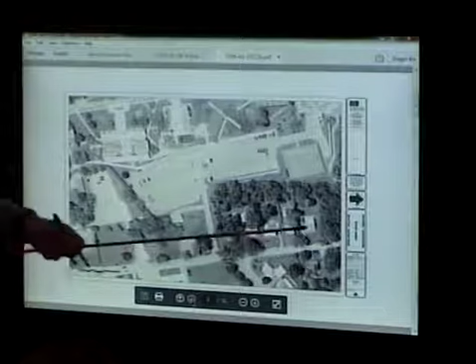Here is E-Lot, which is a student, faculty, staff parking lot. Atwater Dining Hall is up here. The Wright Theater is here. The Johnson Arts Building is here. St. Mary's Church is here. Shannon Street here, Short Shannon Street here. Okay, that's how it exists today, pretty much.

There's a house that isn't pictured here - this is college student housing, 7 Shannon Street, I think it is. And then there's the Insight House, which is one of the solar decathlon houses, which is here. There's a white barn here, which the college uses for cold storage for the theater department.

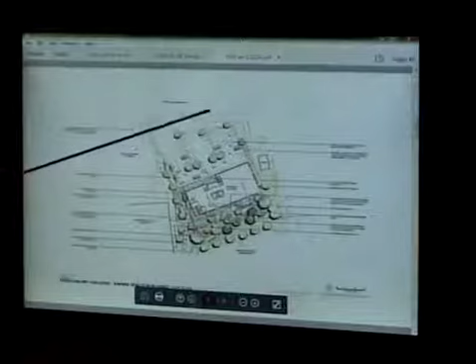So this is the south end of the parking lot where we propose to put the building. Here's the access road that comes up from Shannon Street into the Johnson parking lot. You enter the building from the north side at grade, or you enter and exit the building from this sidewalk, which comes from College Street, down behind Sunderland and Johnson into an entry plaza, entering the building here, or here, both at grade.

This is Keith Wagner Associates, our landscape architect, and this is one of their drawings. You can see we've done quite a bit of landscaping here.

We've been speaking with the church, St. Mary's Church, Father Luke. We do a little regrading along this area to capture stormwater runoff, bring it down into a series of rain gardens here. And I'll let Brent talk to the stormwater management plan and the rest of the public utilities.

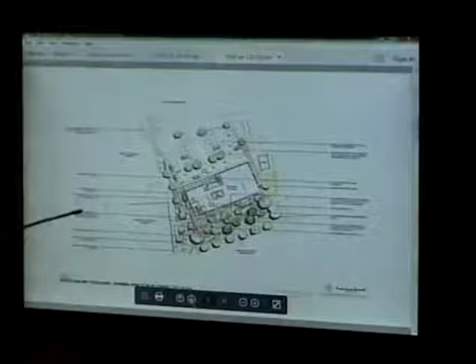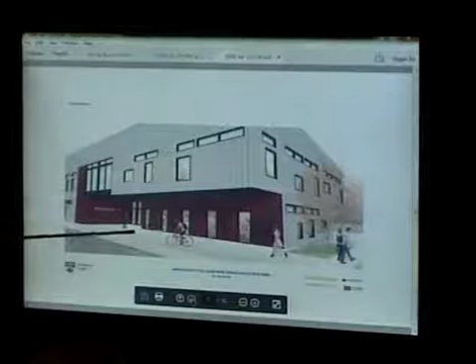Here's the main entrance, we'll call it. Again, you come in at grade, some bike racks and the like.

This is a view as you come down the path from College Street behind Johnson and Wright. So this is, I wouldn't call it a secondary entrance, but another entrance to the building.

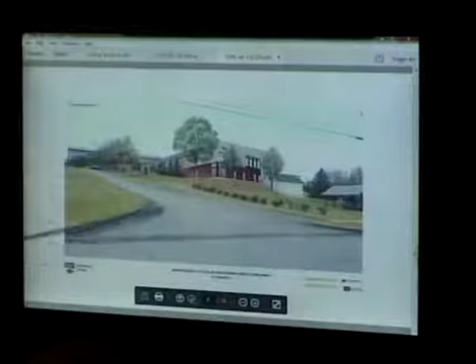Here we're looking - here's St. Mary's Church on this side, the parking lot right here. This is the entry road to the church parking lot. And you're on Shannon Street at the base of that church drive, looking up at the building.

Okay. All of them? Yeah, next one. No, I think that was the last one. Was that the last one? Mm-hmm. Okay, so could you go to the renderings, the last package we sent? Yep.

John is our architect for the project. Ask John to talk about the architecture a little bit. Okay, and then we'll do the site and do stormwater, the civil design.

So this is the best spot to stand over here. I think so. Okay, well, I don't know, if you stood on the other side, I wonder if we would hear you better. We could just try it. You guys hear me now? See? Yeah, okay, so we just need the signal back.

There we go. Okay, so as Tom said, we've made a few adjustments and developed some more renderings. And what I'd like to describe is the major components of the architectural design.

So to begin with, we are working with what's called a pre-engineered metal building system, which means this building's steel structure components are going to arrive as a package to the site and get assembled onto an existing site-cast foundation that will be put in place. Oftentimes these pre-engineered metal buildings are what you see out in industrial parks and in the sprawling edges of towns - not always the most attractive buildings to look at, but they're economical, they go up quickly.

Our challenge here, what we're trying to do architecturally, is to fully understand the pre-engineered metal building system and its components, and get as much as we can out of that system to make something that will look attractive on the Middlebury College campus and to the surrounding community.

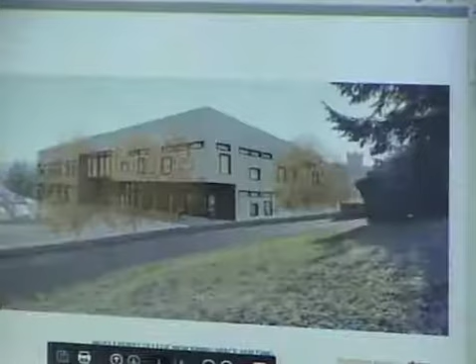The first major strategy is to use the steel structure. We start with what is essentially a big box, but then carve into it in certain places and remove portions, like the whole front entrance here. You can see how it's recessed, creating a long covered entry, not unlike the field house built on campus. I like to think of it as just a front porch in a sense.

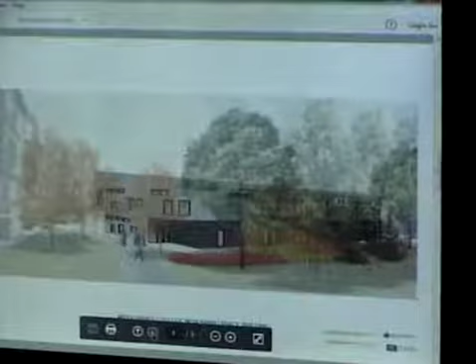Moving around to the secondary entrance, you can see this is all a dark bronze color instead of the red—this is the southwest entrance. Here too, this shell of a building has been carved into and parts have been removed. So that's a strategy to try to break down the mass.

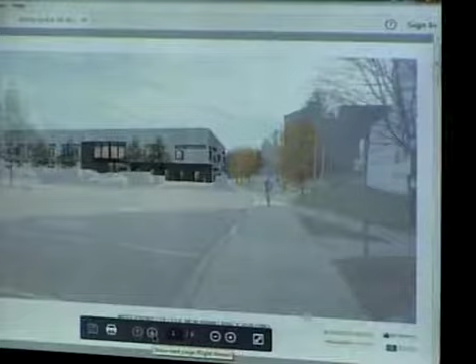The second strategy is to think about the skin that's available to us, the metal panels that come with these kits, and how we might use those off-the-shelf parts to create a sense of hierarchy and scale and break down the building.

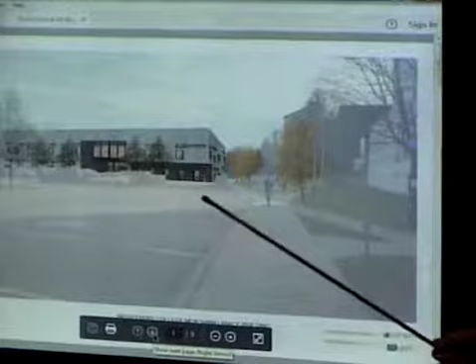We're working with two different siding systems or panels, and I've got samples of the real thing. This is what we're calling the secondary or minor field of the envelope, which is this dark bronze ribbed panel. And this silvery gray panel is called a batten panel system.

The idea is that the primary field, which you see here in silver gray, is predominant, and it picks up on the color scheme of the stone buildings on campus and of St. Mary's Church nearby. It also has a batten profile that relates to the copper-clad volumes on the Johnson Building adjacent to it. So we're trying to pick up on the shadow lines, the profile, texture, pattern, and rhythm and spacing to tie it into its neighbors and the general campus language.

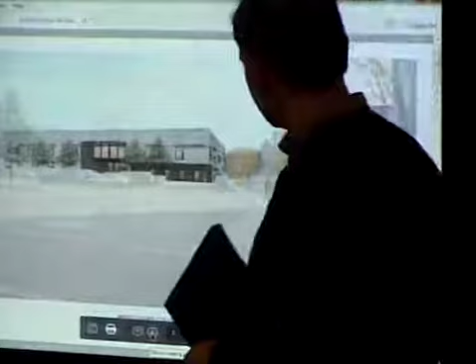This secondary system, the dark bronze ribbed panel, will have ribs running horizontally, whereas the battens run vertically. This is not unlike the courses of shingles and clapboards you see on some of the houses in the surrounding area. It's similar to the gable end of the field house at the college, where there's parking adjacent to it—similar to that panel as well.

This darker skin relates to the primary entrances of the building, to the approaches and where you come in and actually enter the building. So it reinforces this idea of these transition spaces, or these porches, as I think of them.

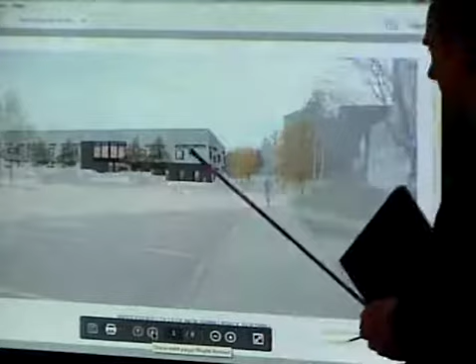One more strategy with the overall massing to keep the scale of the building down is the roof slope, which is real shallow—only a 1 in 12 roof pitch. We're doing that to keep the overall height of the building down. We're at 34.4 feet at the high end, sloping down to about 28 feet at the low end.

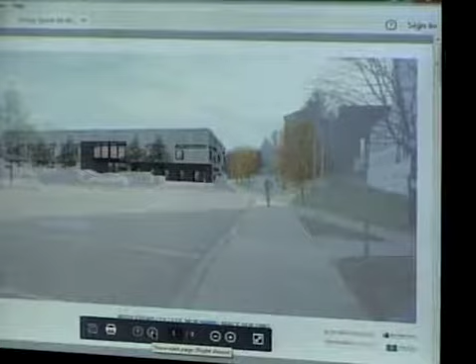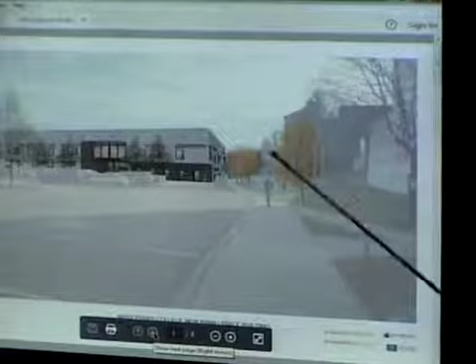The third and final obvious architectural element of a building is the windows and doors. We have three different kinds of windows and doors we're using in this building, and we're trying again to create a hierarchy and some visual interest. At the ground level, in that dark bronze zone, you can see these big 4-foot by 8-foot windows that come down to the ground.

And so that's really where pedestrians are, where people engage the building, where when you're inside the building you're looking back out to the exterior. So that happens all around the building in the dark bronze zone.

The second system is these higher clerestory windows, if you're familiar with that term. These happen up in the silver gray zone, above typical ceiling level, about 10 to 12 feet up, and they let in daylight up high. You can't really see out of them other than to see the sky, but they let daylight into the interior spaces.

And then there are also these windows that you see here, which we call vision windows, more at the height of a human being. So when you're in your office or your classroom, you can look out and see the surroundings.

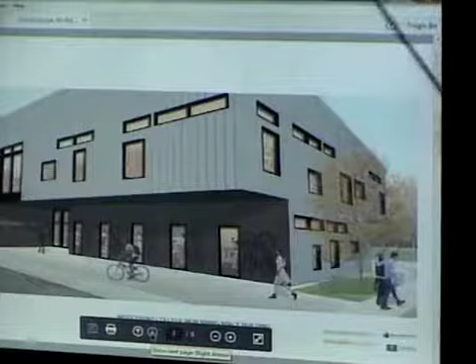And then the third and final piece of the scale of the window and door system is these major areas of glass. Jen, maybe let's do a quick spin around the building.

So there's one back here at this entrance. If we keep going, you can see it there on the corner. These are located in places where there are main entries, where there are particularly nice views, like here out to the east, to the mountains, and in places where there's an obvious relationship to the site. So, main approaches to the entry, views to the exterior, and they correspond to public spaces in the building, like the lobby and the student gathering and meeting spaces.

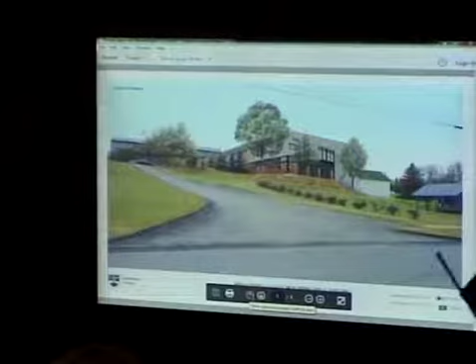So that's a quick overview. Let's look at the rest of the renderings.

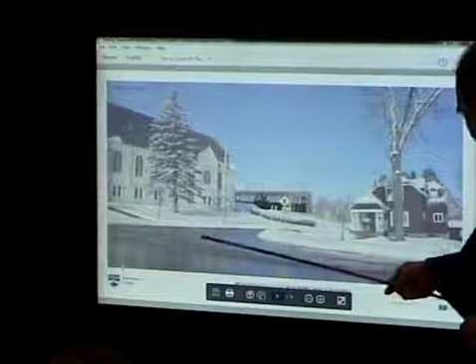This is from Short, Shannon and Shannon. I'm sorry, this is College Street, and this is Shannon. There's St. Mary's, 248 College.

So you can see we've rendered the building as it would sit in this view. This is Short, Shannon and Shannon. There's the drive up into the existing E-lot.

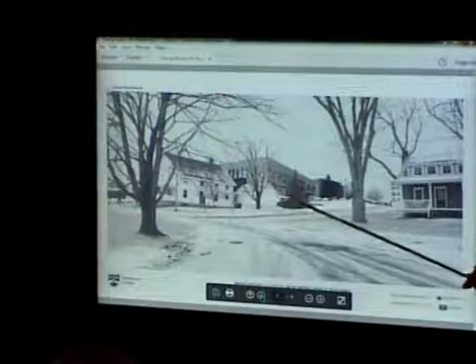So the building really, because the land terraces down from the high ridge on the campus all the way down into town, we've tried to place it into that overall topography so that it's stepping with the massing of the campus and the town.

This is coming up the drive, not quite to the parking lot. That's the barn that Tom described. There's Johnson Building. I think, is there one more? No, okay, that's it.

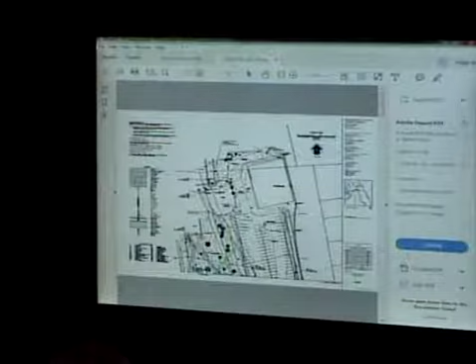Good evening. My name is Brent Rakowski. I'm with Otter Creek Engineering, the civil engineer for the project, working with the college in developing this property or this site.

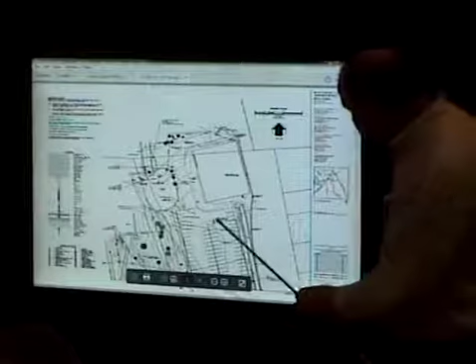I think the first area, just in terms of orientation, as Tom mentioned, this is the northern part of the Johnson lot and the existing footprint where the tennis courts currently are. Here's the southerly extent of the property adjacent to the church, and here's the actual line of the parking lot that's there, and access up off of Shannon Street.

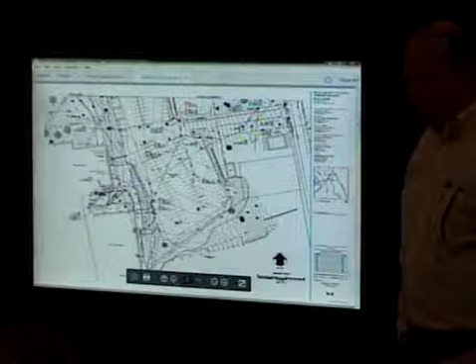For this project, Otter Creek has developed a plan for water and sewer service, so they will both be municipal connections to the town system. The water will be connected to an existing water line that runs along Shannon Street.

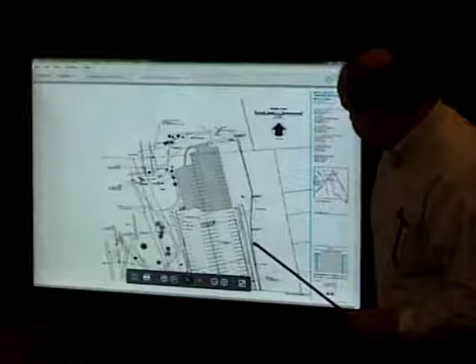A new 8-inch water service will be run up the service drive and then turn. Jen, if you could move to the next, keep going. No, I don't know if you have a proposed plan. Oh, there you go. So this is a proposed utility plan.

As I mentioned, we will be tying onto the town's municipal water system right along Shannon Street and running a new service line up to feed the building. This will come into the new building here at the northern end.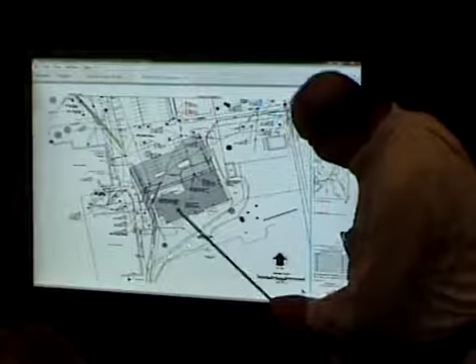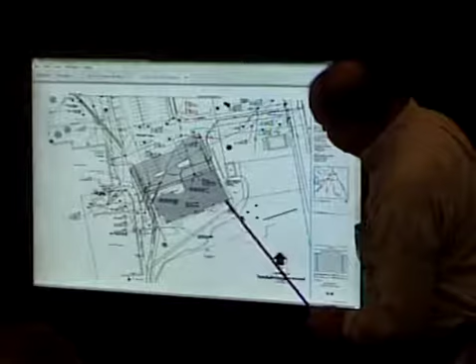In terms of a reference, it'd be good to keep in mind that here's a loading dock area that goes to the Johnson building, and an existing tree here, an existing tree there, just in terms of scale and where that new building sits in relation to the existing parking lot.

Part of what we are doing from the stormwater side of things is there will be some rerouting of existing drainage coming down from the uphill portion of the site, which will be picked up and collected in the existing system, but rerouted and then tied in to the town's collection system.

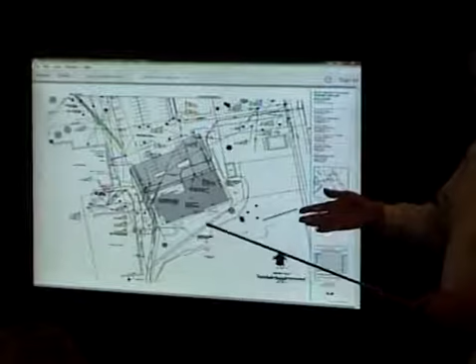From the building, the rooftop has a uniform slope, with everything draining to the south. Falling off that rooftop, it'll land onto a stone drip edge, and within that stone drip edge there will be an under drain pipe to collect the drainage. Once water falls onto the stone, it gets into this under drain piping, which will route it to a stormwater treatment area.

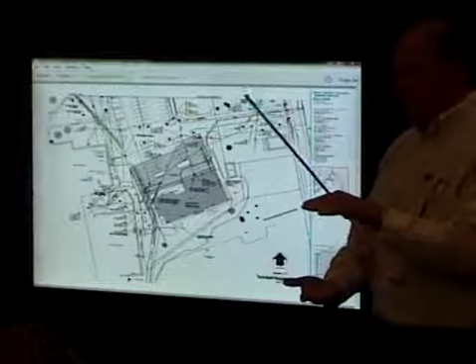The intent of that stormwater treatment area is to filter the runoff. Any pollutants in the runoff will filter through a planting bed section—a mixture of compost, soil, and sand—and below that will be another under drain, which will pick up that filtered runoff and route it around the building, tying back into the town's collection system. Larger events will be...

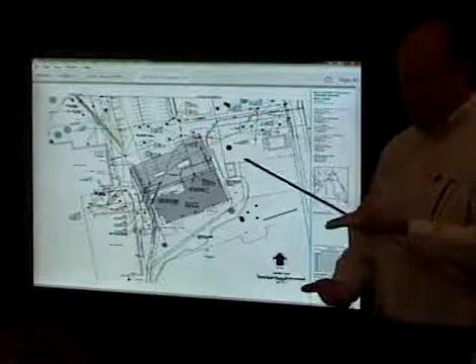temporarily detained within this pond—I don't want to say pond, that's the wrong idea. It will allow for some storage capacity. So larger storm events will be captured and detained for a little bit, then released into the town system.

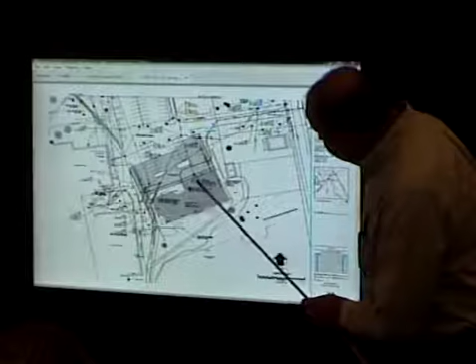So that's what's happening for stormwater and water to serve the building. Sewer will come out of the mechanical room and tie into an existing sewer line that runs down the hill back to the town system.

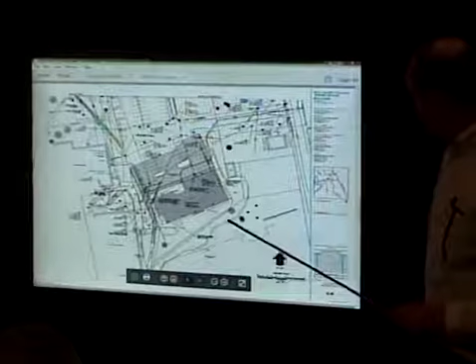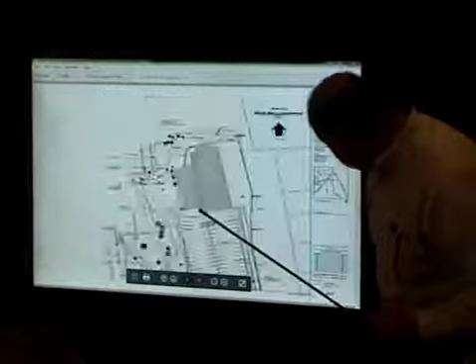Jen, if you can go to the north side of the lot, or maybe the back a little bit. The C4, I think it is. One back, one more. Three, yeah.

As I mentioned, the existing tennis courts on the north side of the Johnson lot extend roughly to this location here. They will be removed, and that area will actually be converted back into grass.

The existing parking lot that ends here will be extended to the north. This area will be regraded slightly to provide a uniform slope, so that runoff landing here will travel across the parking lot. What we will be doing is installing a stone diaphragm along the edge of this parking lot to pick up runoff coming off the parking lot.

Within that stone diaphragm is similarly an under drain, which will pick up water that filters down through the stone. That under drain will daylight to an existing culvert just to the north of the site, into a natural drainage way that runs down towards Weybridge Street.

As part of our work for the project, we are required to obtain a stormwater discharge permit from the state, similar to what some people refer to as an operational permit. There will also be a construction general permit, required for disturbance during construction—anytime you're ripping up and exposing earth with more than an acre of disturbance, you're required to obtain one. So we will be doing that.

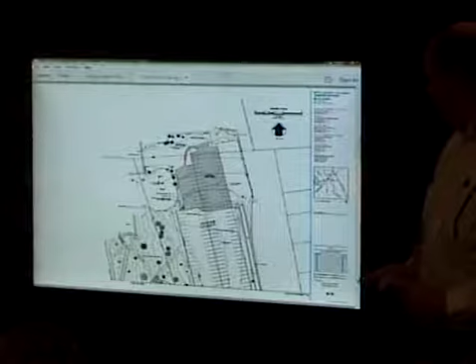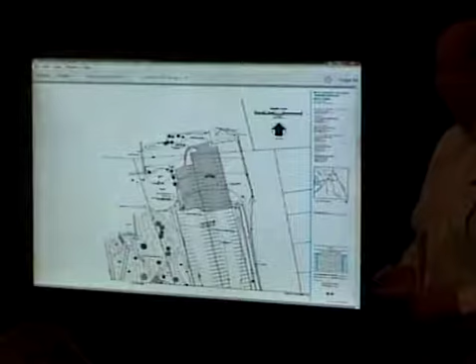We're slightly above that level, but we will be getting one of those along with the operational permit. And with our water and sewer improvements, we will be doing a water/wastewater permit through the state. Those are both municipal connections, as I mentioned. And I think that's all I had.

Brett, while you're there—could you show us what amount of parking will continue to be used for the college during construction?

Our logistics plan for construction would be to take the entire south end, which is what you see here. This part of the lot will be closed during the construction period.

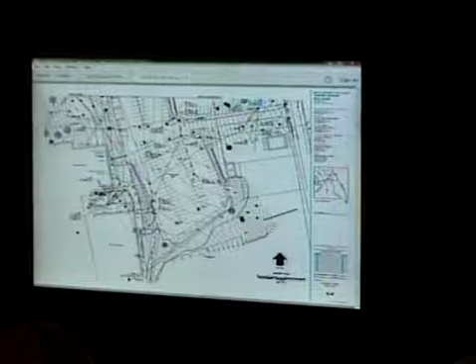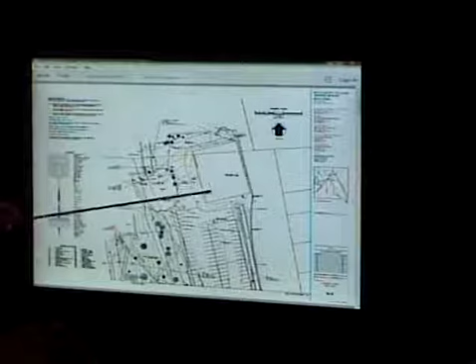The conversion to parking would be the first thing we would do. So we would like to, if we get all of our permits in hand, start construction following commencement, right around June 2018—doing this work first while the language schools are in session. When we start for the fall term in '18, this parking lot conversion work will be done.

Other questions from the board at this time? I was just—you started talking about collection, the difference between stormwater collection and sewer collection. You kept referring to the town's collection system. Stormwater is not going into our sewer system, correct? It is not going into the sewer—you referred to the town's collection system. Oftentimes, engineering speak, they're both referred to as sewer.

You're referring to a town stormwater system that collects the stormwater and takes it to a separate outfall, right? Yes, correct. The town actually has existing drainage, a stormwater collection system along Short Shannon Street that runs down towards Weybridge Street and then discharges into the natural ravine along Weybridge Street and then gets to Otter Creek.

Is there fire protection hydrant back there? There is actually an existing hydrant down on Shannon Street. Short Shannon, yeah? I'm trying to find something that works here, sorry. On Shannon. What about the aerial photo?

But won't the building have pumper connections? Yes, the building will have a fire department connection on the building. And I know Chief Shaw has looked at the plan, and I can't recall what he said about a hydrant connection, Brent. I believe the existing hydrants, I believe that's it right there in the picture. Yes, that's it. That's where it's located.

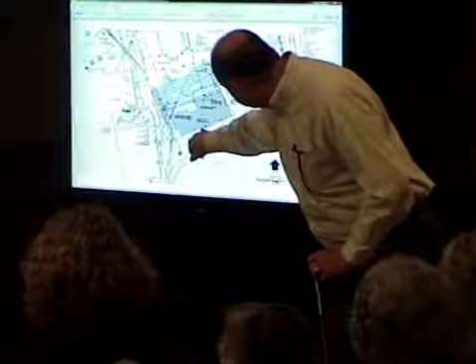One other point I would like to make that you just brought up that I hadn't mentioned is that just this past week, we had done some soil testing up on the site. So this is a progression of the design as we work through these design phases. And we did some testing along the proposed route of the water line, also in the footprint of the building. You can see in some of these locations, there's obviously you can't read it, but there's a little circle, darkened circle with a number designation next to it.

Those indicate locations where we did soil probes and soil borings. What we found was that there was a presence of ledge in the area. It's inconsistent, very similar to what we find in Middlebury. You'll have ledge that's 2 to 3 feet deep in locations, and then 20 feet off to the side, you won't find any ledge.

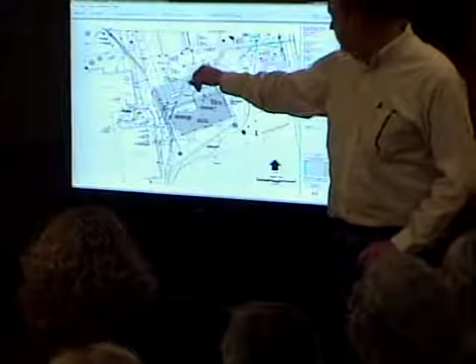So we are anticipating that we will likely have to blast to put that water line into depth. Regarding that, is it still a practice to do pre-blast surveys? Oh, yes, adjacent houses. Yes, so as part of that, part of the state permitting, we will be going through Act 250 as well.

Act 250, or I should say the Agency of Natural Resources, has recommendations for blasting that include pre and post blast surveys. They will do an assessment before any of the work is done, come back afterwards, do that same assessment. That is incorporated into the documents that the contractors will be using.

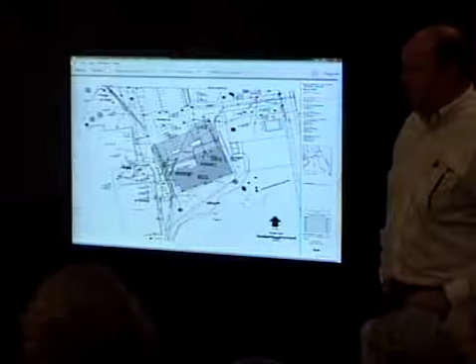Ann, you had the floor? I have a couple of questions, probably for Mr. McGann.

Does the college anticipate replacing those tennis courts elsewhere during this period? No, we don't. Those are purely recreational tennis courts.

Okay. And what about the computer science department when the new academic building, which isn't before us obviously, is completed? Will the computer science department be relocating elsewhere on campus from this temporary building? We're working through that scenario. So the purpose of the building is to relocate the Department of Computer Science from Bicentennial Hall to allow us to expand the remaining programs that are in Bi Hall.

And at the same time, they'll be on the second floor of the building. At the same time, the first floor of the building will—we haven't determined the final sequence yet—house the occupants of Monroe, an academic building on campus, the occupants of Warner, another academic building, and the residents of Adirondack House, which is up by Adirondack Circle on College Street. It's the career services building.

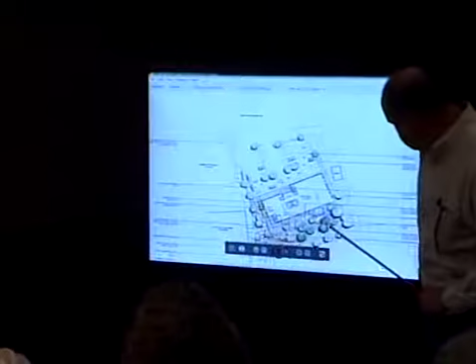I don't think we have that. I didn't see it when I went by it. I don't think so—there are some existing trees in that area, roughly that height, but I believe... Well, I'm wondering whether there's any possibility—maybe there isn't room for it, and maybe the soil's the wrong stuff, I don't know—but incorporating some larger evergreens, say, to break up that corner a little more.

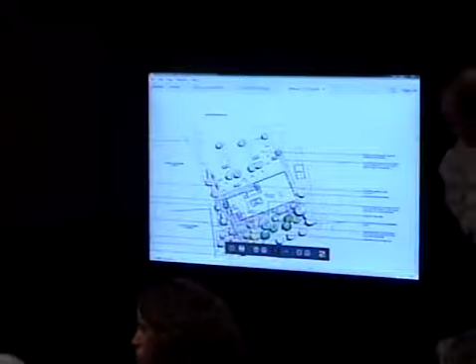That might be a question for the landscape architect, but we can certainly answer it. I can tell you that the renderings show the actual species, and they're all at the appropriate deciduous heights, and that was reviewed by the landscape architect. And some of those in that hedge may grow taller over time, but I'm more interested in a more immediate screening. Okay.

Other questions from the board at this time? Yeah, I have a question. John or Tom, what's programmatically happening on that corner of the building we were just looking at with the tree? Is there a trash area or service dock for the building? There isn't a loading dock.

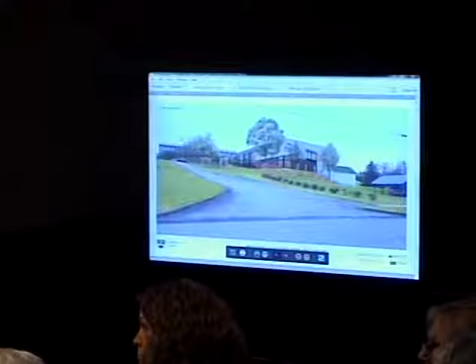Typically, how we handle the trash for an academic building like this is custodial services collects the trash and puts it out in front of the building. Our custodial services recycling truck comes by and picks it up off the curb.

Is it a big classroom? I see a big volume on that corner, on the ground floor. That ground floor is actually more of an open office and meeting space plan currently. It's flexible and will change over time. The idea is that corner can look out into this rain garden area and landscaping. Right now it's designated as a group meeting space for the offices on that floor.

Are you anticipating any volume of foot traffic, say, coming from College Street, walking down Shannon Street and then maybe up your access road? Not cutting across and coming down Shannon Street any more than the students do right now.

There is a footpath if you come down behind—let me point. College Street is out here, and the students tend to come down this way and then cut through a gap in the trees at the top of the St. Mary's parking lot, down St. Mary's Drive, across Shannon Street, through the elementary school parking lot, and there's a cow path, for lack of a better term, behind the elementary school leading down to town.

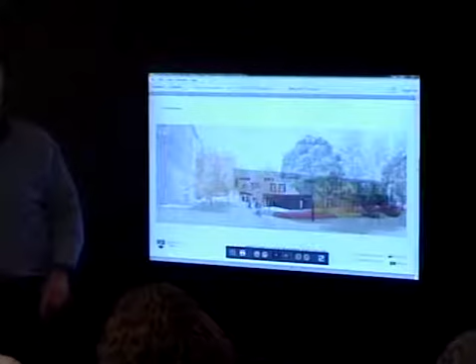But this will be a destination for students. So yes, we will have students coming to this building from College Street, and we'll have students coming down the other way, from Chateau and Bicentennial Hall. We don't see, if I got your question, increased pedestrian traffic going beyond the building.

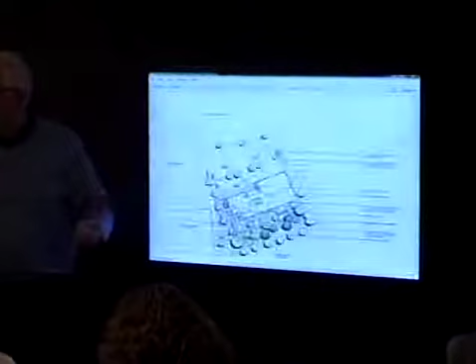Well, I was by there today, and there were a couple of students walking alongside the road. I believe they had come down your access road onto Shannon Street and were walking south towards town. I don't know if they went behind St. Mary's School, the old St. Mary's School, or if they went out that street. There's a number of times I've been through there when students were trying to cross where there is no sidewalk on the north end of the school into the student residence there.

My thought was, would it be possible to extend the sidewalk on the northern side of the driveway of St. Mary's, more to the north, so if students were going up that access road or to the two buildings there, they would use the sidewalk rather than walk in the road. Just a point of observation. We can look at it.

So the north side of the access drive—I see the students on the east side of Shannon, north of St. Mary's. The St. Mary's sidewalk ends at the northern egress, wherever paved, and it stops there. If a sidewalk were to begin at that northernmost point and go north, maybe to the point where Shannon and Short Shannon intersect, that might help out pedestrian traffic.

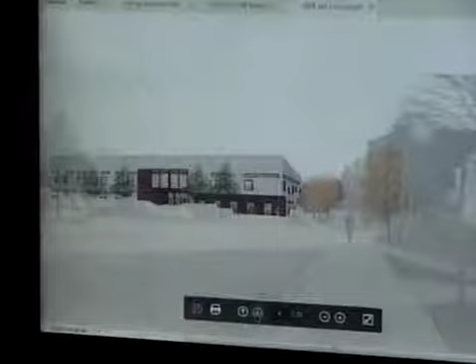What is that? I'm on C4. C4 is the one with the new proposed building, that one. What?

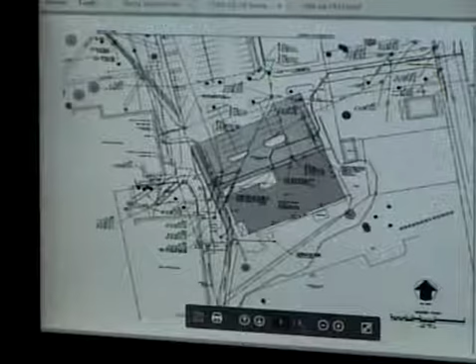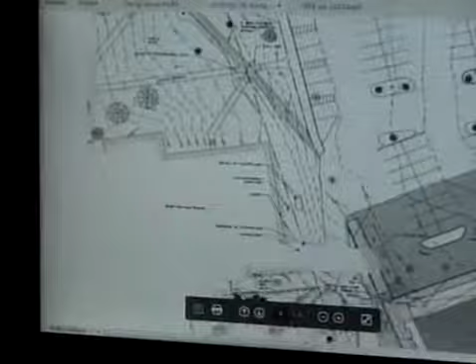What is this space here? That's the treatment, the filtration. Well, there's actually an outdoor patio area, a seating area. That's a component of that, and then just to the east there you're seeing some, almost looks like eyes, I guess—those are the treatment.

That is a portion of the patio. So this is actually an outdoor seating area, and this is just a leg of it. I'm not the landscape designer, so excuse me, but it's just another seating area that's somewhat more remote. And then these, right now as we're working through the design, are the treatment areas.

There's just a couple things I wanted to confirm, this applies a bit to the master plan. We're not going to compromise that green reserve area at all, that's identified in the 2008 master plan. It doesn't appear so, but I just wanted to confirm. That's correct.

And the setback from the residential area where you're converting a tennis court? I believe we talked about 100 feet. Correct, and that complies with the 100. Yes, it does. So you have the property line, Short Shannon Street houses, and then there's a 100-foot buffer between that property line and development in the residential area.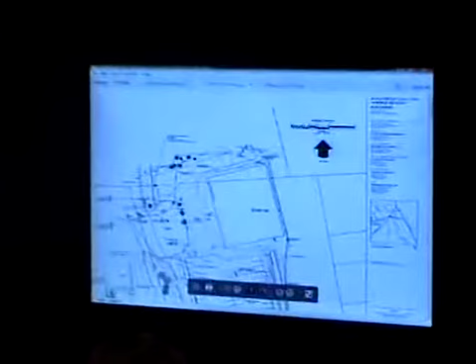Have we talked about the exterior lighting plan at all? Another late thing I just sent to Dave and Jen was a photometric plan of the parking lot. On the building, in the recessed canopies, there'll be recessed lighting to light up the entries. No other exterior mounted lights on the building.

On the photometric plan, what we're doing is just reusing light fixtures that were taken down for the construction of the building and extending them. Oh good, you have it up. Reusing those at the tennis court side.

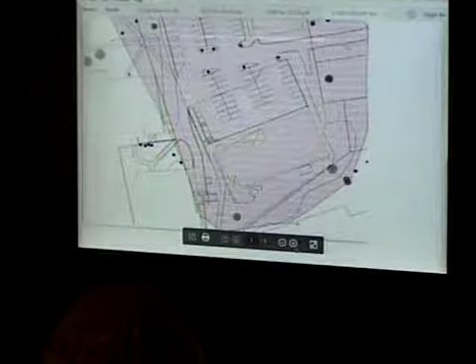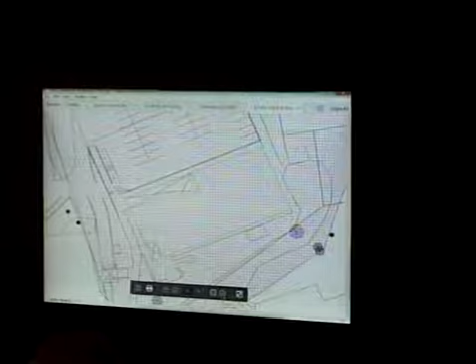What we can't see here is that each one of these maroon figures has a lighting level. The hatched part of the plan we gave you, the edges of the hatching represent where the foot candles go down to zero, so that gives an indication that there won't be any bleed beyond that hatch area. The engineer designed it to town standards for lighting, pole heights, foot candles, etc.

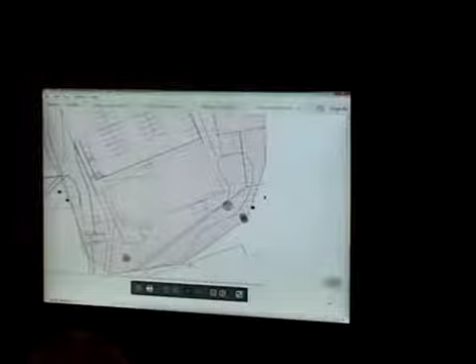And security for the students? And security for anybody going out to their vehicle in that parking lot. It meets the standard, yes.

Just one other thing. If I understood you correctly, you suspect the amount of traffic will not be increased. This building will not increase the amount of traffic? To a noticeable amount. That is my belief, yes.

Okay, I'm going to open up to the public now, but I want to make clear there are really two parts to this application: one is this building, the other is approval of the master plan update. We have yet to discuss that, but I want the public response on the building aspect first. Once we have that, we'll go into the master plan update, and then there'll be an additional period for public involvement on that process. So at this point, I'd open it up for public comment. Please indicate your name and the town you are coming from.

Wendy Warren, Middlebury. I live on Shannon Street, directly across from the building. There are multiple topics I'd like to talk about tonight. Can we start with stormwater management? Sure.

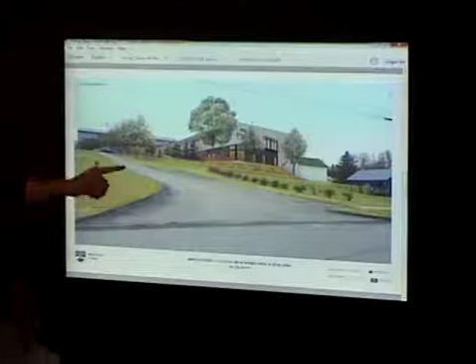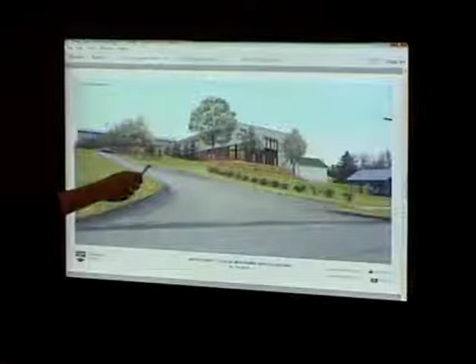Currently, one of them is completely buried in snow. So during this past winter, with two heavy rainfalls, that water just flies down the street and runs into my driveway. Those storm drains are not kept clear by the town. This is a steep slope, and this roof is going to be dumping 13,000 square feet of water onto that steep slope, which is very close to this steep driveway. It doesn't look steep in this picture, but anyone can drive onto Shannon and see how steep it is.

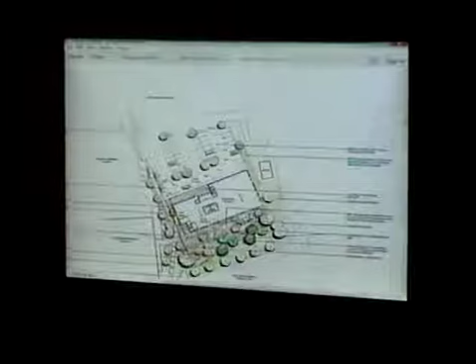So all that water is going to fly off that roof, down that slope, down that road, no storm drains, into my driveway, into my neighbor's driveway, into our basements. Currently, everyone on Short Shannon Street has a water issue in their basement right now because the stormwater management of the current parking lot, with rain gardens and catch basins, does not work. The water runs down the parking lot into all these people's basements, and then they have to pump their water onto the street, which freezes. It's a nightmare.

It's a sheet of ice. Go down there, and Hannah here lives across the street, so their water gets pumped out onto the street, and then it runs into her basement, and then it's going further down the hill.

So the rain garden does not work when the ground is frozen. Terry Purcell at the state admitted that to me on the phone on Friday. Rain gardens do not work in the winter. Six months of the year, the ground is frozen. So that is not a good plan.

And rain gardens really don't work as a catch basin filtration system for a lot of water, which is what's going to be produced by that huge roof. So whatever plan you come up with, it has to be much better than it is now. Even what you're talking about building is not going to work with it being on a steep slope. The water is just naturally going to run downhill.

And it's dangerous. How much water is coming off of St. Mary's parking lot as we speak now onto that road? While the snow's melting, isn't that a significant amount of water already coming off from St. Mary's parking lot? Yes it is, because there are no storm drains there. Yeah, it's kind of a river, especially if it rains in the winter, which it has been doing, and it probably will continue to do year after year.

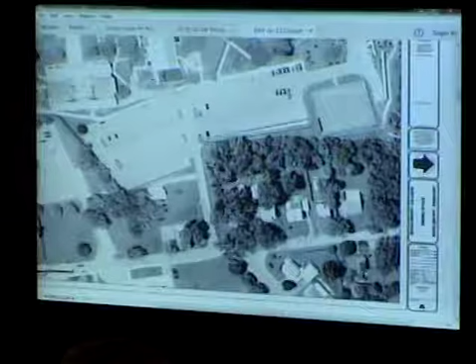When you plow, I've watched the guys plow, and currently they push the snow to the east. So there's a pile in the south, next to the barn, and the east along the cedar fence and by the tennis courts. So is that going to continue further to the north? Because you'll no longer be able to pile in front of where the pile in the south is, where the building is. So that's where the majority of the snow melt will be occurring, to the north side.

To the east side, the Shannon Street side. Shannon Street side, yes.

And so within the stormwater plan, will it account for the snow melt? Because all we've been talking about so far is rain.

The stormwater plan currently is not designed to accommodate, it's not specifically targeted at, snow melt.

So if I'm understanding correctly, nine months of the year we have a stormwater plan, maybe more if we're not including snow, but when it melts from now until April, if I understand what you said, there's not a specific designed system to accommodate snow melt.

So the piling of snow, where those maintenance practices occur, the intent is to treat runoff from the rooftops, from the pavement, from the parking lot. So oftentimes the piles of snow coincidentally happen in those same locations.

It seems like treating runoff when it occurs as rain is one stage of a storm management plan, but dealing with where you're putting snow—I know when I'm plowing my driveway, where I decide to put the snow is where I make sure that when it's melting, it's not going to be an inconvenience. But from what I understand, that kind of mindset isn't in place with this plan.

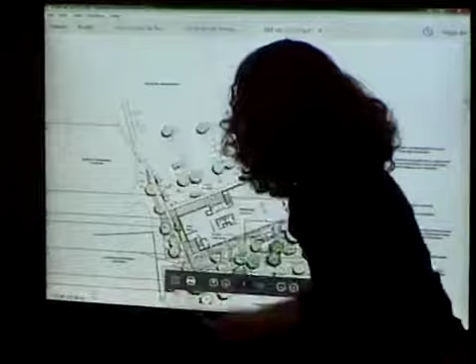If it works—a rain garden will not manage 8,000 gallons of water. We have a very competent civil engineer who has to comply with state regulations, and we will look to get permit sign-off on it. We will look at the plan very carefully, because we live there. Other questions?

That was on the parking lot. Yeah, so I just wanted to, so I'm Jeff Howarth.

I'm from Middlebury, I live on Shannon. I'm a professor at the college, and ironically bought a house so I could walk to college, so it's funny to see the parking lot just keep on growing. But I like the old photograph. The rendering? No, the air photo.

Oh, so it was fun to look through the old historical photographs and see that, you know, this was a field at one point, and then the tennis courts got put on it, and then the parking lot and all of that water got put on top of that.

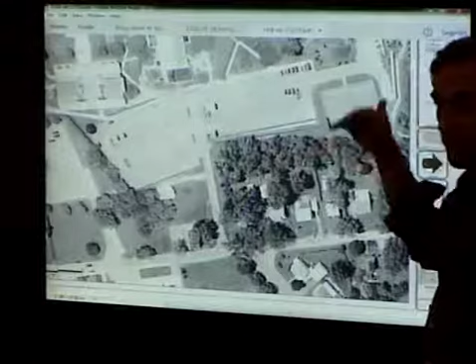So when you talk about changes from the current condition, you just have to think about a baseline condition. If you want to start with the parking lot, it's fine. You could start with this all being tennis courts, you could start with this being a field. And right now, you push all the snow here, and it all kind of drains down.

I bought a galvanized tub because I was tired of throwing all my water into my neighbor's yard, and I used the water from the tub to water the fruit trees I put in around the house. It's a 75-gallon tub that will fill up in about 12 hours. Trees get a lot of water, so I'm dumping that constantly. I'm not sure what this does because my property is actually below this system that is in.

If you're going to improve on that, that's fine. If you're going to push all that snow over to here, I don't know exactly how that'll all work, but I know that you guys believe this will work, and I'm someone who loves data. The problem is, you don't think the traffic's going to change—I think the traffic will likely change. If you're wrong, we just live with it.

We don't really know, partly because we don't have data or any kind of understanding on what the baseline conditions are, what water is moving through, how people are moving around, how losing 40 parking spots for students affects things when you have so many senior dorms in Atwater. It seems like we don't really know what the effects of all this are going to be.

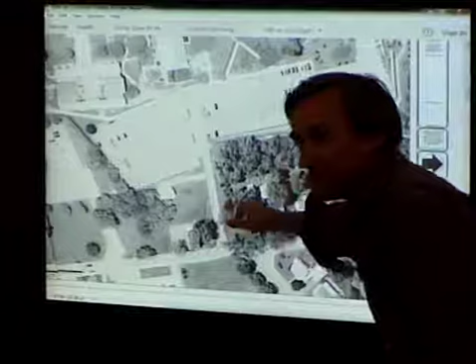You're going to increase lighting—I can live with that, because you're going to put more of those bulbs in the parking lot behind the house. But I think for me, the idea of blasting through here—all of our houses, all of our foundations sit on that ledge that you're going to be blasting through.

So for me, the concerns really are the blasting, whether this drainage system is going to work, and why we're kind of trying this—whether you even know what the impact of the college is on the drainage system there, let alone whether you're going to improve on it.

And then certainly circulation. There's a footpath that goes down here. I have kids coming through my yard a fair amount to get to the rental down here, to get over to Weybridge. And then there's no sidewalk here.

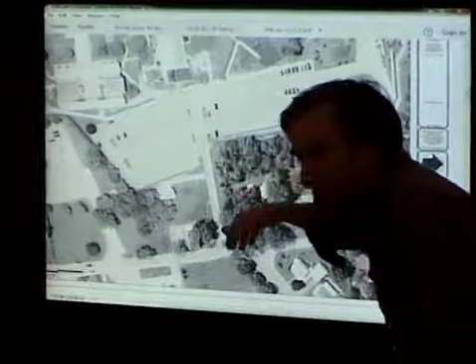The big thing here is we've been doing piecemeal kind of development here for a long time, and this is just another piecemeal kind of thing.

If that's a temporary building, does that mean the tennis courts are going to come back, or is the parking lot change permanent? So you're going to add 40 spots to this parking lot over the long haul, correct? It hurts to think about putting this huge temporary building in when there's this big empty building sitting right down the way. It's not from the college. I know, but it's still there.

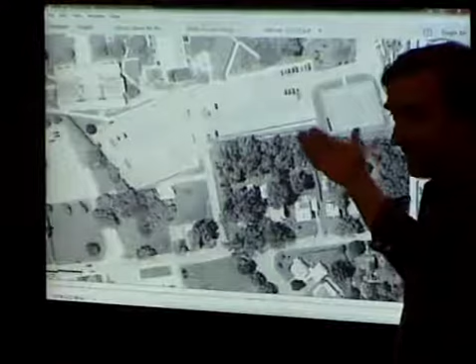There weren't really too many questions there, other than just a few things about the site, the history of it, the way it functions right now, and how we know whether these plans are really right over time, and if they aren't, why does it matter? I mean, we just live with it.

Do you have a 10-year plan as to what the college is going to do? Are they going to move that building to some other place after 10 years, or? Potentially, we could move that building elsewhere, or we could just take it apart and recycle it. Other questions, comments? Yes.

Bill Schaefer, I live at 178 College, and the view from my deck is kind of diagonally across from where this building is proposed. So lighting is a concern, traffic is a concern, but more specifically—

I heard comments earlier that there's a significant reduction in the parking area, maybe 15 or 20%. I also heard a comment alluding to the overflow going to park on various streets, perhaps College Street. So as the town views the need for parking and the overall perceived traffic change, a question I have is: are those spaces the college would like to utilize already designated for buildings that exist on those streets? And if so, can that be part of the proposed larger plan, where randomly cars can go park where there are designated spaces for specific buildings?